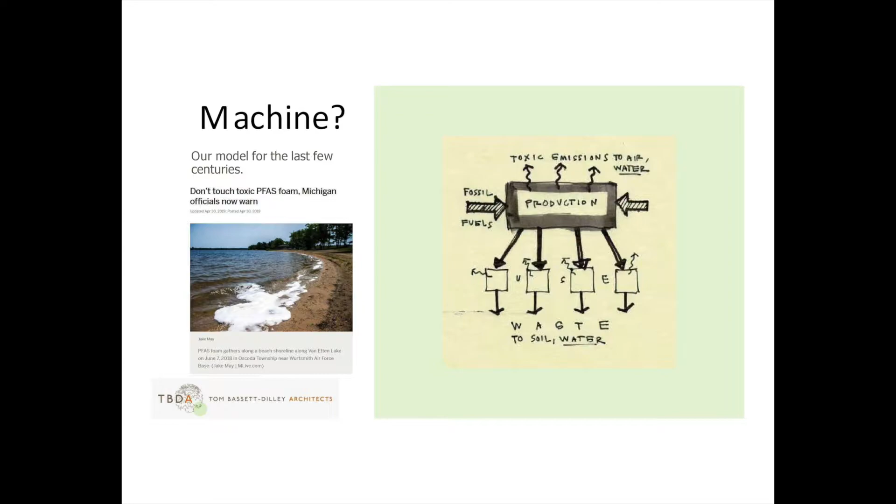And so back to the report card, when Michigan Live says don't touch the water, that is a failing grade. So we got to do better. What can we do? What's the different model, right? So you read another page in the infinite book of nature, and there's so much to learn there. And the model that I look at, my dad was a biochemist, and so I'm always looking at like cell diagrams as a kid, plant physiology, photosynthesis, like that's what we're talking about with solar photovoltaic, right?

And so if you're not using a lot and your neighbor is, your energy goes back out into the grid and it fills the holes. And so suddenly you take that centralized thing and you decentralize it. And it's a really resilient scenario because you don't need a big plant that if it breaks down, everybody goes into blackout, right?

You've got this, and if you've got backup storage, whether at the utility level or at the personal level, man, you can survive. You can survive the line outage, whatever. So this is a really different model. It goes from the man down to the people, to put that power to the people. But I ask you, who is this good for?

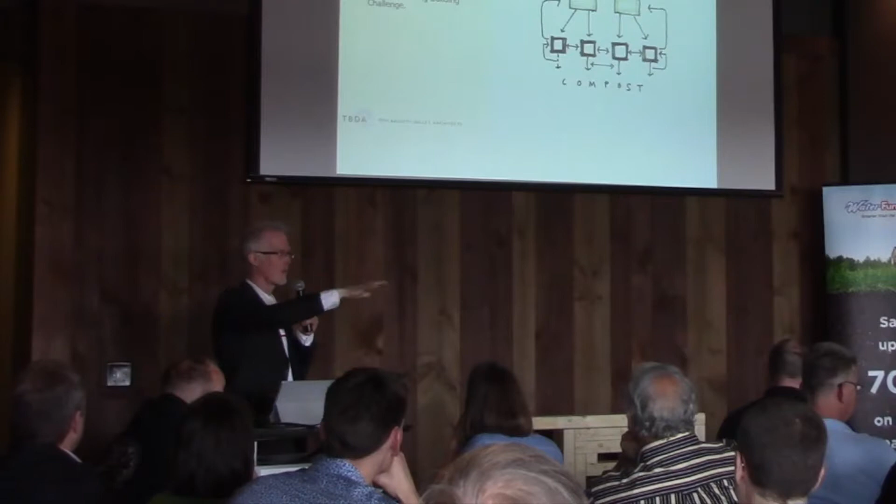So, all right, enough of the philosophizing. Well, I could do that all day. I just want to tell you a little bit about where I'm coming from here.

I formed the firm in 2006 because I really wanted to go after this idea, which we were at the time calling green, and now we're calling sustainability. But to me, it's the sanctity of life. That this is a beautiful world, and that is the reason to do things right. Really, that's the ultimate goal. So we say our mission is healthy, beautiful, efficient buildings for a clean energy future.

Towards that end, I got my passive house training so I could figure out how to design the world's most efficient buildings based on conservation, not just on renewables, et cetera. And so we've done a lot of passive house certified buildings. We've done some LEED certified buildings, Green Star for a renovation project, and DOE Zero Energy Ready Homes. We've done them frame, ICF, SIPs, and modular prefab.

And every time you do something new, I've learned you're going to take some lumps. So we've taken some lumps, but we think we got it figured out. We're going to keep going. And so I want to tell you a little bit about what we're doing and why we're doing it. In the office and in the architecture profession, we're using Architecture 2030 as our measuring stick. The goal is to get the buildings contributing to the solution, not the problem. That means that we want to get to carbon neutral in the building sector by 2030.

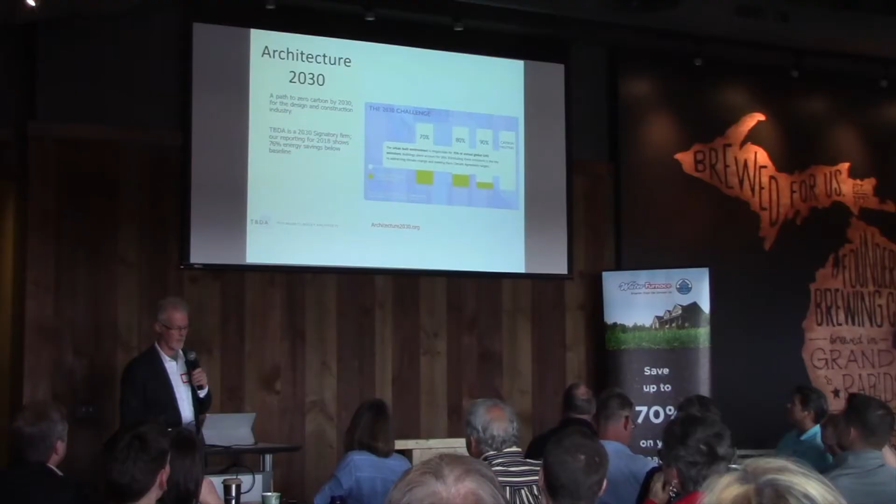So we can take those really efficient buildings that we do and put a little solar on them, because a lot of them are efficient by means of conservation, not simply by means of production. And that's really the passive house approach, and we'll talk about that in a sec. So over the past, gosh, Molly, what year did you draw the drawings for that blue build, that Lima house? It was 2013, right?

2011? Okay. So over the last 8 years, 9 years, yeah. Molly was working for me then. It was the first certified passive house in the Chicago region. So we were really thrilled about that. So we've done a number of these, and these are net zero.

A few of them are actually net zero in terms of the solar is on from day one. A lot of them are passive house certified or zero energy ready homes. So this is kind of a lot of residential work, a few park district projects. Just quickly, the methodology we use, it starts with the design, of course, and a conversation with the client and what are your goals.

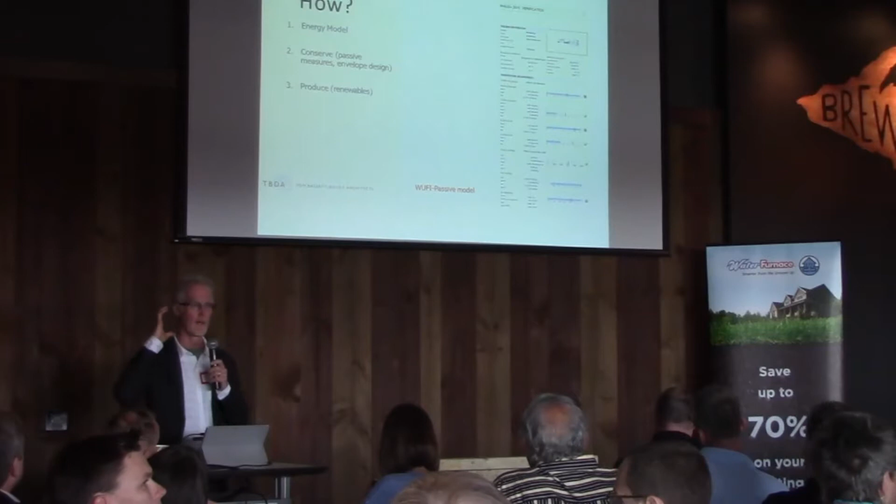And we got to get aligned and make sure that we're all as a team, builder, architect, owner, after the same thing here. Are we going to go for net zero, net positive, living building, LEED, passive house? What's the motivation, right? So once we identify that, we start the sketches, but we start an energy model right away. And the idea of the energy model is that we're going to optimize the design of the building for the site, for the construction methodology, the mechanical systems, the windows, the geometry of the building, how many windows and where they are. All that stuff feeds in.

We use WUFI Passive, which is the Passive House Institute US energy model. And so once you have that model, it says, okay, here's how much energy you're going to have to put into this building every year to run it. Then you know how much solar you're going to put on to offset it. You can't do it without an energy model. I mean, you're just guessing.

And I'm not saying that that's not a valiant thing to do. If you do a really well insulated building that's ventilated and good building science and all that stuff, you're still doing a great thing. I'm not saying it's foul if you don't energy model, but if you want to get to net zero, you really want to know what the dials are and just really optimize it. That's the thing. So that energy model really makes us know how we can conserve, how we can optimize the envelope, and then from there we go to production. We go to solar, typically not wind.

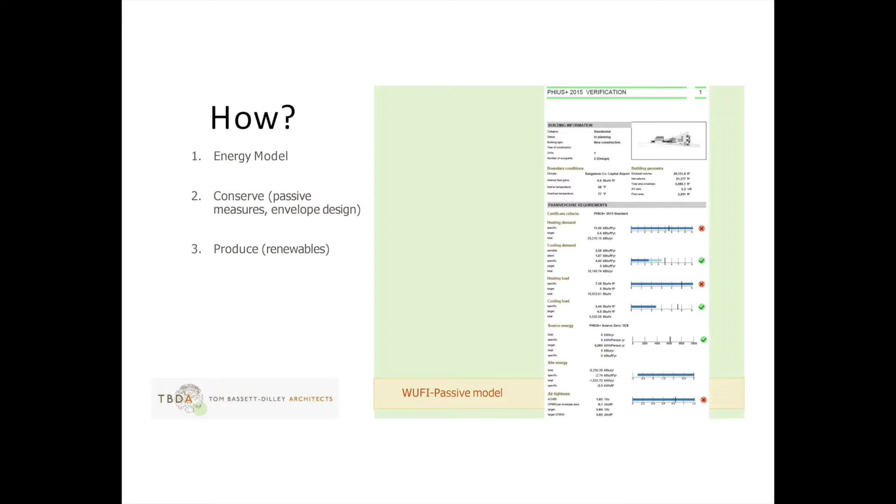And this is an output page from WUFI Passive. And this is interesting. The red X's are showing that we're not making the passive house certification targets, but we did make net zero. It's hard to read here. The next to the bottom tab is site energy, and you can see that we're producing about 6,000. Well, this is in kilo BTUs. Sorry, about 1,800 kilowatt hours a year more than we're using, and this is a house in Springfield, which I'll show you a picture of in a sec.

So how we design it, whether we're doing a certified passive house or not, we use the methodology and the thinking of passive house to optimize the envelope. And so the key things that we've come to are ideally you want a compact form. You don't want a really sprawled out form because that has a lot of surface area and you're going to be losing a lot of heat.

The analogy I like to use is my cats. In the summertime, they're sleeping on the bed. They're like this, you know. In the wintertime, they're just curled up in these little balls. So we're designing for the winter loads typically, and even in the summer, compactness is going to make it easier to control your energy.

So good orientation goes with that. You're going to make sure the windows are in the right place. From a solar standpoint, you don't want to overheat from a big blast of western sun. You know, this is a thing about lake homes. You got to be careful with shading or really low solar heat gain coefficient glass. So that all goes into this energy model and lets you see how you're doing. It's really fun to tweak those things and just watch the numbers pop up and down once you get that model populated. So that's kind of the really big picture stuff.

But then next thing is airtightness. Tim, you're right, absolutely right on. Airtightness is key, not only from an energy standpoint, but from a durability standpoint.

Because if you have your bulk air leaking through your envelope, you're going to get condensation issues. You know, there's a lot of things about airtightness that is absolutely rock solid important. So the airtightness strategy we diagram with this little red line that kind of goes all the way around the envelope. And so here we got a slab on grade house.

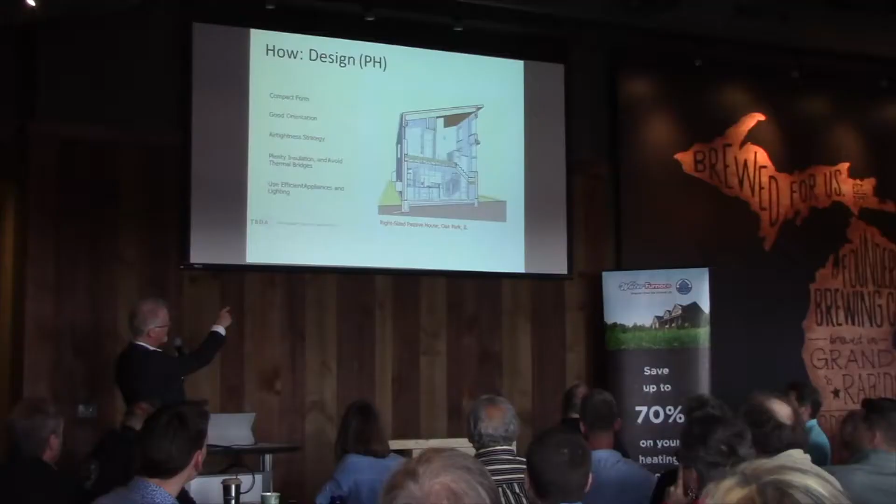The foam is going underneath the foundation. They make these little J forms that you can do that with, so you don't have to try to do what we did here, which is form it on site. The foam keeps falling away because it's a bond break. That was frustrating. But then we've got stud walls with cellulose. We have continuous foam on the outside of that. And so the sheathing is the air barrier typically for us.

Now, these days we're using ZIP sheathing a lot of times. You just tape the seams and you make sure that all your penetrations are taped off to that, all the windows, the electric service, the plumbing service, whatever is penetrating is really well sealed. And you test it with a blower door and make sure that you're good. And then you wrap it with the insulation and the siding.

So the thing is that this airtightness strategy has got to be really well thought out where wall goes to roof and where wall goes to foundation. These are the critical junctures, and there are some pretty straightforward techniques, but they take a team approach, you know. So yeah, study those things, get them nailed. And then, of course, part and parcel with that is looking out for thermal bridges.

So this is one of the things that as an architect, especially one growing up on Frank Lloyd Wright, just seeing all these fabulous cantilevers, you know. A lot of those cantilevers, like piece of steel from the inside, piece of steel to the outside. And what's that steel doing? It's not just sucking energy out, but it's also hitting a dew point temperature in there somewhere. And of course, it didn't matter in his day because there was no insulation. You were just pouring heat through the assembly and you were drying that assembly out.

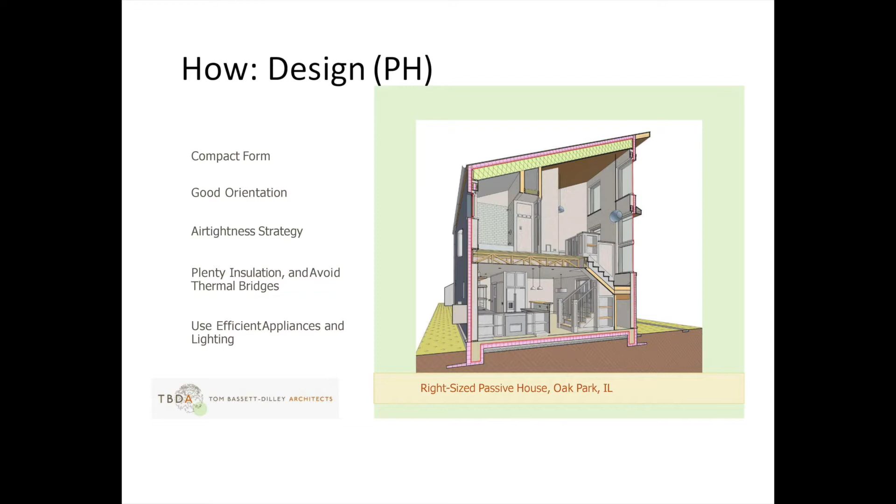It's great. But when you start putting insulation in and you start making it cold and you start stopping the air a little bit, then you get into real problems. This is one of the things they drilled into us in passive house training is you have to think really carefully about where the condensation is and how you're controlling the air.

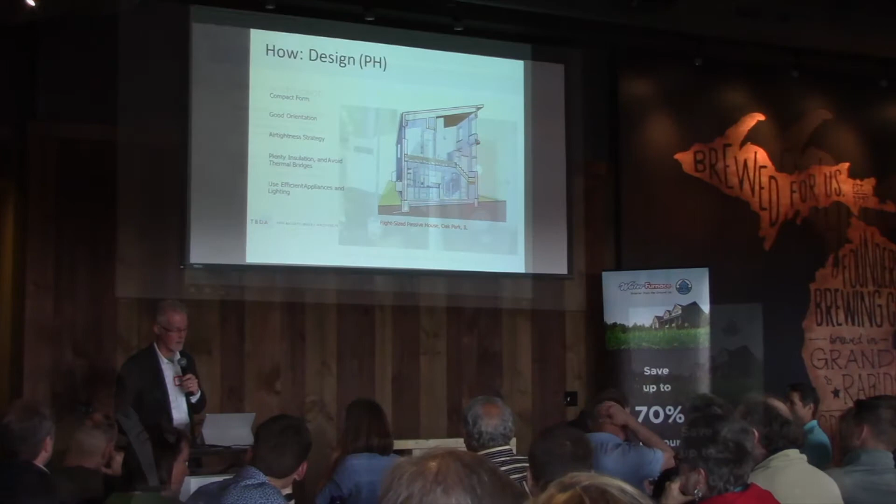In construction, well, building science is something that, like I was saying, we always get really kind of drilled in. And I just would encourage everybody, if you haven't been there, to go to buildingscience.com or get Joe Lstiburek's Builder's Guide to Cold Climates. There's so many good principles in there, and there's so many good examples. And it's funded by the DOE Building America program, so it's all free online.

It's a fabulous resource. That is in design, thinking about where condensation planes are and how you're managing bulk water, et cetera. But in construction, it's key, making sure that it gets implemented like that. You don't have your voids and gaps in the insulation, et cetera.

The construction thing that we've really seen is how important quality control is. The crew, it's not just the GC getting it, it's all the way down to the crew, particularly the framers, the electricians and mechanical, anybody who's penetrating the air barrier or wants to penetrate the air barrier, really needs to be on board with how things go together and what are the goals for this project.

The diagnostic stuff in construction is really great. We really encourage all our clients to get all of their buildings third-party verified, so we can have a blower door test a couple times. Even if it's not getting verified, we want the blower door test there early before drywall's up, when the air barrier is open and we can deal with it, we can fix holes, etc.

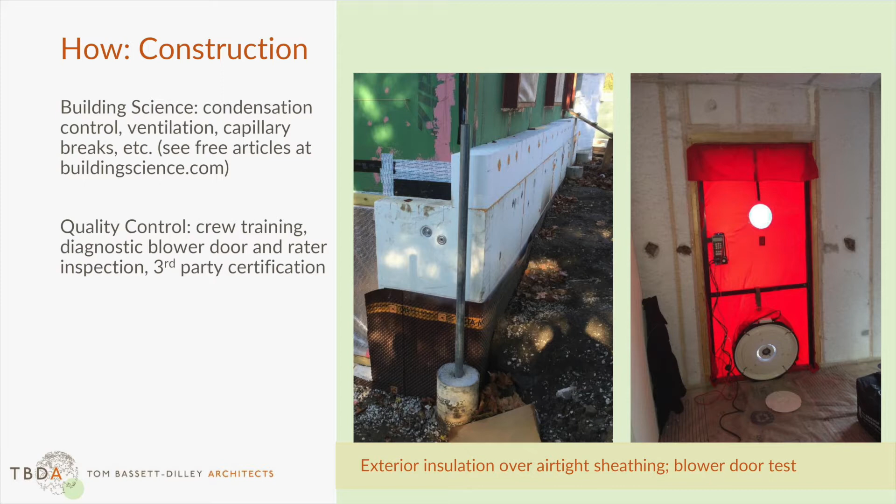So quality control. All right, case study. This is the third or fourth passive house we did. It's in Hinsdale, right on the train at Bowdoin and Hinsdale Avenue. And these assemblies are kind of over the top.

What's interesting about the passive house standard is it's sort of changing on a code cycle, like every 3 years. And they've reduced the demand on the envelope requirements, and made it more stringent on the overall energy standard. So the standard has like 3 different main targets. Your mechanical system demands...

5 minutes. Okay, all that time I lost here? Okay, then you gave me credit.

Okay, good. So anyway, this is 2015, and we had an open roof, so we poured in cellulose to R95. We kind of overkilled it. The walls are 2x6, it's kind of hard to see there. 2x6 with cellulose is really conventional in terms of the framers. What's odd is what's outside of that, which is 5¼ inches of EPS. And it's 5¼ because we did 2x12 bucks, so we could frame the walls with the window bucks in place with 2x12s and tilt them up. So once you have the 5½ and the ½ inch sheathing, and then your buck on there, you fill that out with foam.

It's just a solid lumber framed roof. So we have our air barrier transition basically at the top plate. We do a little piece of zip in there, actually a ½ inch, because that's what we use for the air barrier. A ½ inch piece of zip before the framing sits on there. So that makes a really clean joint. We don't have to try to lay a membrane in there. It's just a way to transition from our sheathing air tightness to our underside of roof framing air tightness. We do the same thing with a truss roof.

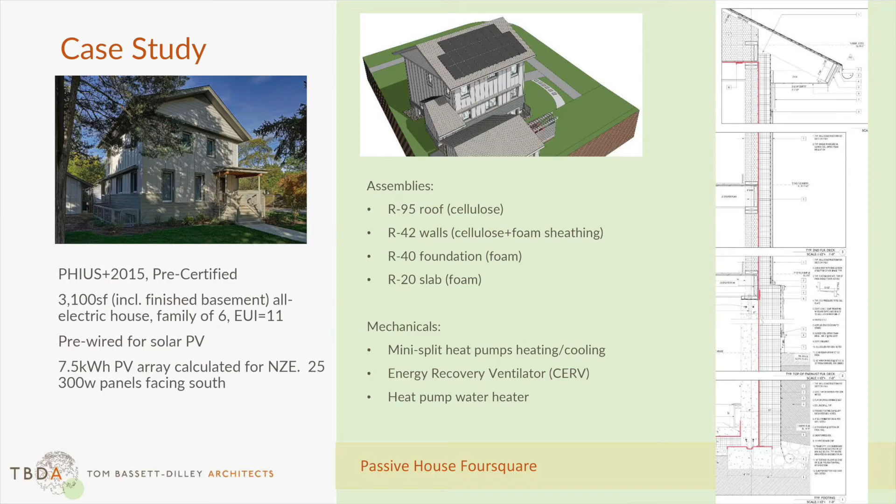This is pre-wired for solar, so we hit an EUI, energy use intensity, of 11. That number means 11 BTUs per square foot annually. I think baseline is 44, so that's how much you can save of overall energy use by going passive house. So we can get to net zero with the 7.5 kilowatt PV array, 25 panels facing south.

This little house near Springfield, Illinois, is net zero. It's LEED H Gold certified by Brett. 2,000 square foot house. Well, I should say it's designed to be net zero. We don't know until it's done. There are no net zero buildings, just net zero users. The thing is, we want to be able to use our buildings and be comfortable and have the lights on at night and still get to net zero.

So this has a little guest house that's detached, so you can be in low power mode. She's living there mostly by herself with her dogs. But the low power mode guest house, you can ramp it up when she has her kids stay or when her architect comes to visit because he loves the house. And so we've got foam under the slab, foam on the outside of the concrete, and then we're using 2.5 inch InsoFast, which is an EPS product with integral ribs. So the siding just goes on really easily.

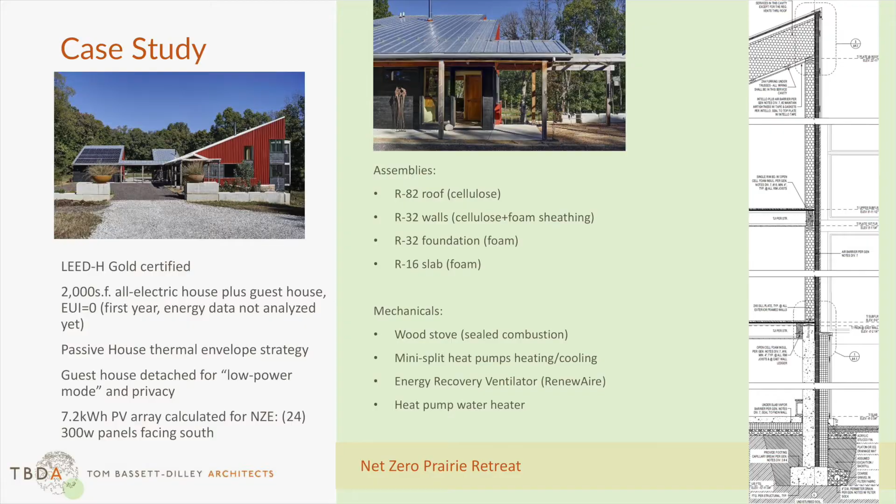We keep evolving away from having to make the GC do multiple passes around the exterior for the wall insulation, which I'll get to in the next slide, which is the simplest one that we've come up with, and we're building it this summer. But basically, it's a 2x6 wall with 2.5-inch ZIP R.

So what we've done in the past is you frame up the wall, you put on the zip, you air tighten it, and then you make your first pass with the foam, and then a second pass with your foam because you have to stagger the seams, and then you put on your WRB, and then you have to figure out how to tape that WRB back to all your penetrations for water tightness and air tightness. Weather resistive barrier, yeah, I'm moving too fast here. Your Tyvek. And then put furring strips on, and then your siding. It's 4 passes around the exterior, and it's nuts.

So with the 2.5-inch ZIP R, which is basically structural sheathing with polyiso insulation, really efficient foam insulation board, that's just one pass on the outside. You can do it before you even tilt up the wall. And then you just put your furring strips on and your siding.

We always put furring strips and back vent our siding because it makes it last longer. It's a good pressure equalization strategy too. So that's a really easy way to get to a passive level wall.

And then we got really sick and tired of trying to put something on the outside of the foam and the outside of the foundation because it's right down there at the ground. It's either going to rot or rust or get kicked. So we put it on the inside and just do a bunch of foam in that zone where the rim joist is to mitigate the thermal bridge.

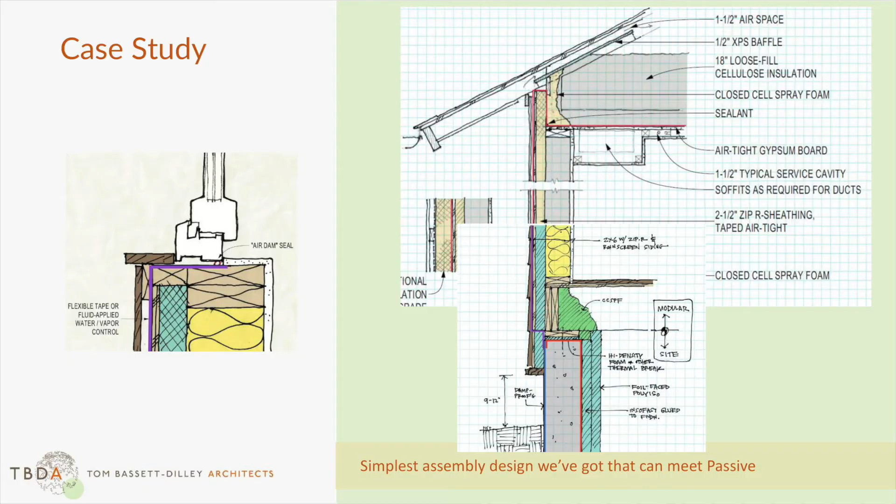So mechanically, all of these houses that I showed you, everything is all electric. We're not using any gas in any of these buildings, so we can truly get to net zero because you can't just undo the gas that you burn. So the mechanicals, we've learned a lot working with Mike and the Mitsubishi team and our mechanical consultants, but we're doing our own Manual J and Manual D for duct sizing, equipment sizing.

Now, we did some early passive houses with just one, sometimes two ductless mini splits, and we just found that you close a bedroom door and the temperatures vary too much. Especially with the ERV pumping in there, because the ERV, if it's not a conditioning ERV, it's going to be making the air a little more humid, a little warmer in the summer, and then the opposite in the winter. So we just said, you know what, we're going to duct to the bedrooms, period.

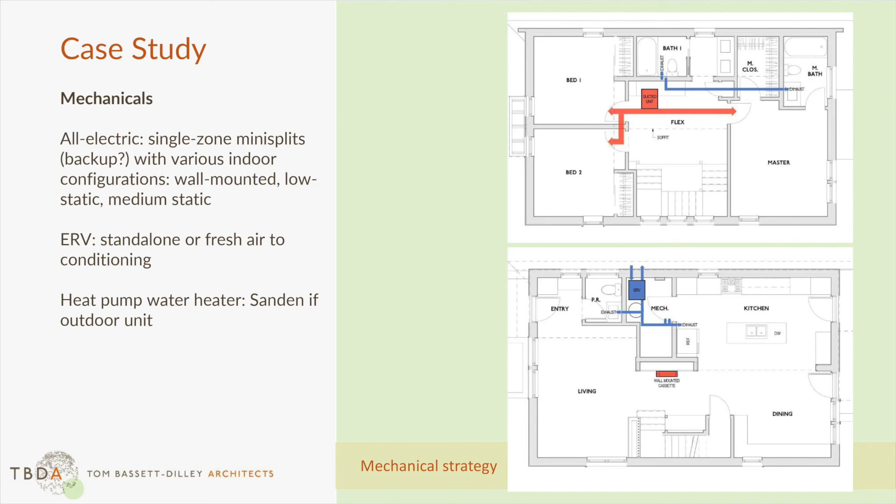If it's in a separate closet, it's not a big deal, but we had one where it was the closet right next to where the owner sat and did her sewing. She's like, God, the floor is cold. And we're like, oh man. So there's some issues to know about with the heat pump water heaters inside. Oh, I could talk about mechanicals.

I just want to say this, what we did was really early adopter stuff, and we were experimenting. There's so many answers now. So many people have done it. And if you're not familiar with Rocky Mountain Institute, check them out. Check out this paper, The Economics of Zero Energy Homes. It is so attainable now.

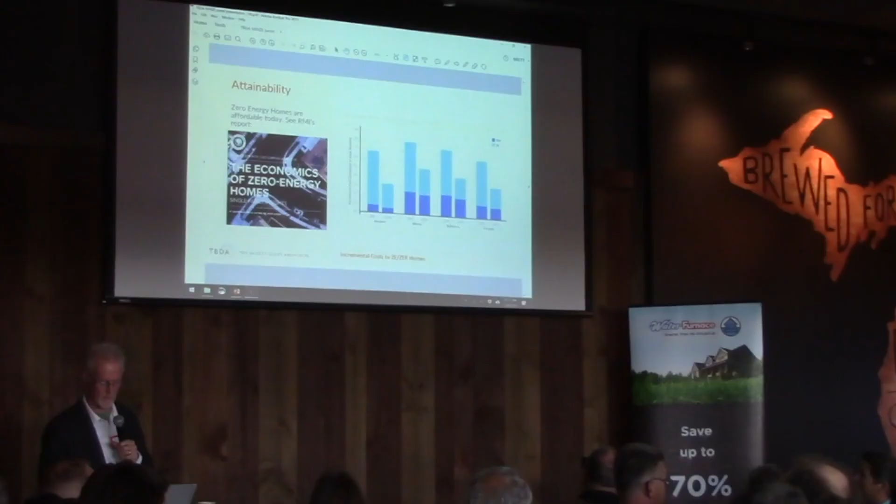They're showing here in this slide, if you can read, Chicago climate, they're saying incremental cost to go from code level to zero energy ready is about 1.5%. So to go to full zero energy, putting the solar on, more like 6.5%. It's true, Illinois, the incentives are crazy good. So anyway, check that out. That's good backup and data.

So I am so thrilled to be with my people, and to say, this is attainable. We can do it. We can clean up our water. We can enjoy this world. We can build a really beautiful future for ourselves.